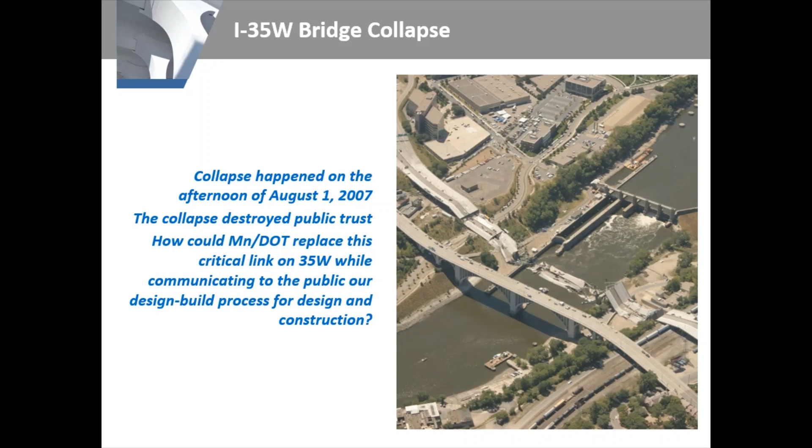Up until the time of the collapse, MnDOT had not utilized design-build on such a large project. The RFP contained criteria for communication, under the public involvement section, which was 15% of the total score. This included impacts to the public and an approach to communication, which was extremely important.

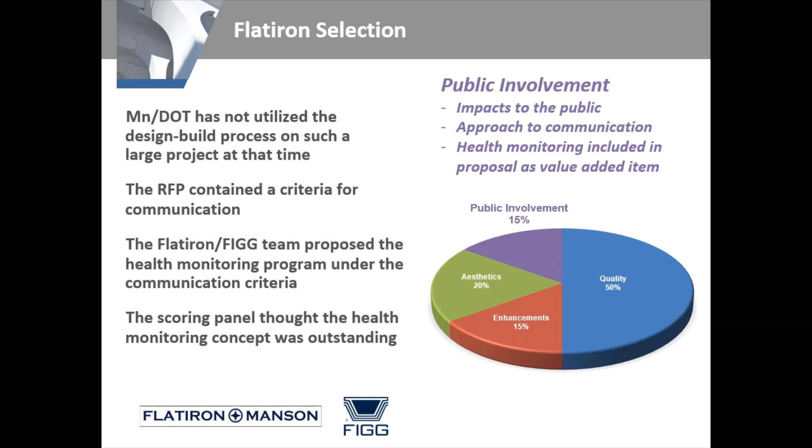The health monitoring system was included under the public involvement proposal as a value-added item. The scoring panel thought the health monitoring concept was outstanding, so it was developed and continued for the project. It ended up being a key component to help restore public trust.

MnDOT engaged with the University of Minnesota, nearby the site, to assist with data collection, modeling analysis, and reporting. It should also be noted that MnDOT doubled the number of sensors that the Flatiron/FIGG team proposed, and in retrospect this was a very good idea.

The goals of monitoring were threefold. One was to provide construction benefits. Getting sensors in at some locations as soon as possible allowed us to have knowledge of structural behavior during construction—for example, determining concrete strengths during curing, and temperatures during curing for mass concrete placements.

Also, understanding the bridge over time, that it was within certain design parameters. This included creep and shrinkage, global thermal movements, live loading such as displacements for a given live loading condition, and thermal gradients throughout the depth of the structure.

Also important was to restore public confidence. During design and construction, MnDOT was frequently asked about the bridge design since the project required a maximum 14-month schedule. The monitoring program was a key component in helping restore public confidence.

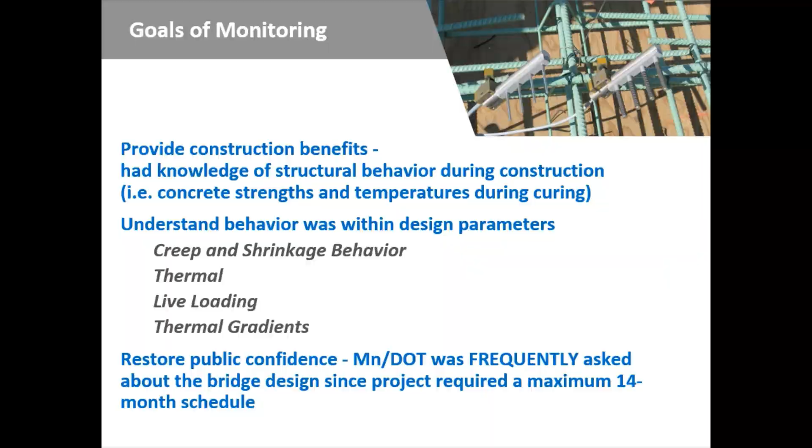Now I'm going to move into a description of the bridge, the design criteria that was utilized, and then the sensor types and their locations.

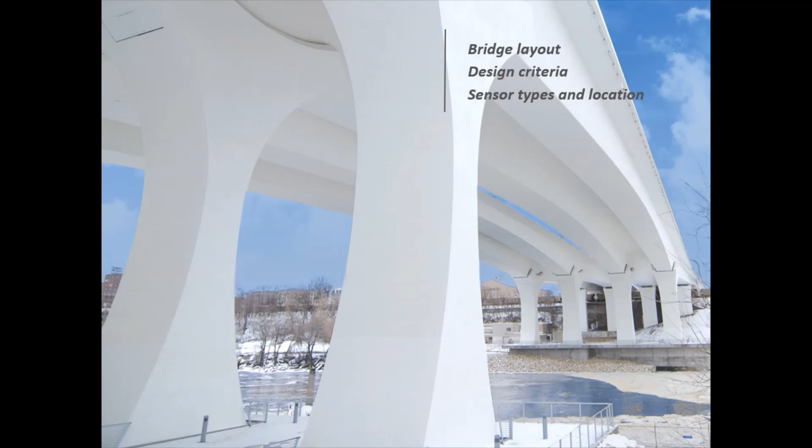Here you can see a longitudinal layout of the bridge. Some key components: it's a concrete segmental box girder bridge. The main span over the river used precast segments, cast adjacent to the site with the long line casting method. The remaining spans were cast in place on falsework.

The 3-span unit, main unit, was articulated with expansion joint at the abutment and at Pier 4, and pinned over the main piers, Piers 2 and 3. The north abutment was integral. The unique shape for the single span at span 4 was due to crossing over some railroads.

Spans 1 through 3 were 25 feet deep at the piers and 11 feet deep at midspan and ends. Span 4, to get over those railroads, was 6 feet deep at midspan. The abutments rest on driven steel piles, and the piers rest on drilled shafts socketed into rock—the main piers, 2 and 3. There's a northbound and southbound structure for the 3-span unit.

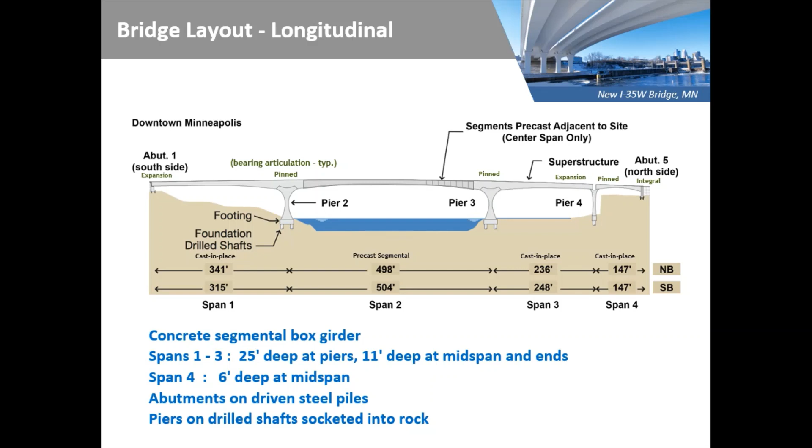The largest span was 504 feet over the river, and the side spans varied from 236 feet to 341 feet. Span 4 was 147 feet. In the transverse direction, each northbound and southbound alignment was 90 feet 4 inches wide—2 parallel bridges, each with 2 sets of concrete box girders.

These were connected with a small longitudinal closure strip in the center. The bridge was striped for 5 lanes in each direction; however, it was designed for 7 lanes, and also designed for a future configuration of 4 lanes plus a light rail or dedicated bus lane.

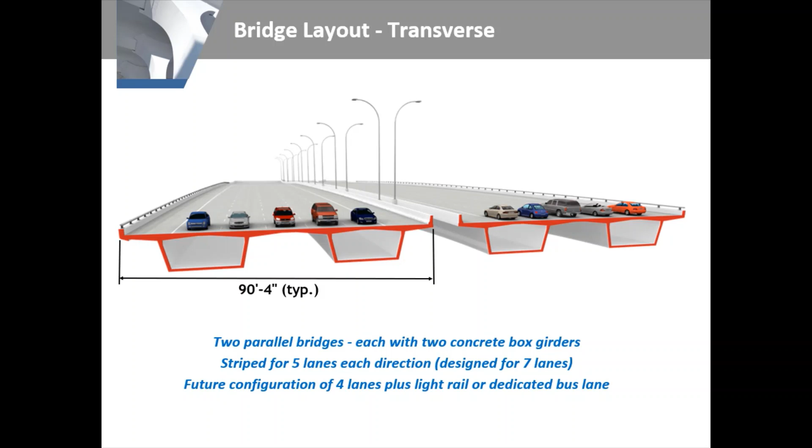Some relevant design criteria for the monitoring study included the following specifications: the MnDOT special provisions and design manuals, the AASHTO LRFD bridge design specifications (4th edition, 2007), and the CEB-FIP Model Code 1978, utilized for concrete time-dependent properties. This integrated with the in-house BC program used for time-dependent staged analysis.

For loadings, pretty basic stuff: superstructure concrete was set to 155 pounds per cubic foot, substructure concrete was 150 pounds per cubic foot, live loading was the standard HL93, and we had that future allowance for light rail as well.

The thermal gradients for design were from AASHTO LRFD Zone 2 with a 46 degree Fahrenheit top surface temperature. For coefficient of expansion of concrete, 6 times 10 to the minus 6 per degree F was utilized. Minnesota has extreme temperature ranges—very hot in summer, very cold in winter. The mean design temperature was 45 degrees F, with a rise of 75 degrees and a fall of 75 degrees.

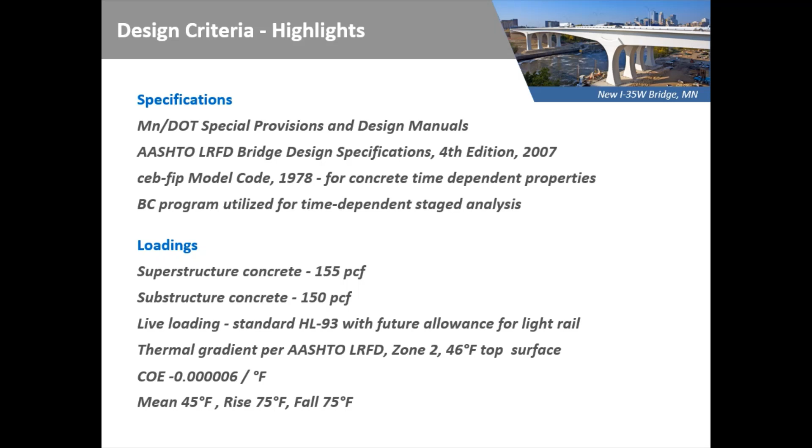For material properties, the pier concrete was 28-day strength of 4,000 psi, and the superstructure concrete was 6,500 psi. Typical PT strand, bars, and mild reinforcement were utilized: 7-wire strand for PT, grade 270, PT bars grade 150, and mild reinforcement at 60 KSI.

The time-dependent properties, again taken from CEB FIP 1978, used a relative humidity of 73%. Major parameters were the creep delayed modulus of elasticity at 0.4, and the creep flow coefficient of 2.38 from a casting day of 0, giving a total creep coefficient of 2.78 from casting day 0 to infinity. The shrinkage coefficient was 0.000223, also from casting day 0 to infinity. These numbers are pretty basic for a segmental bridge.

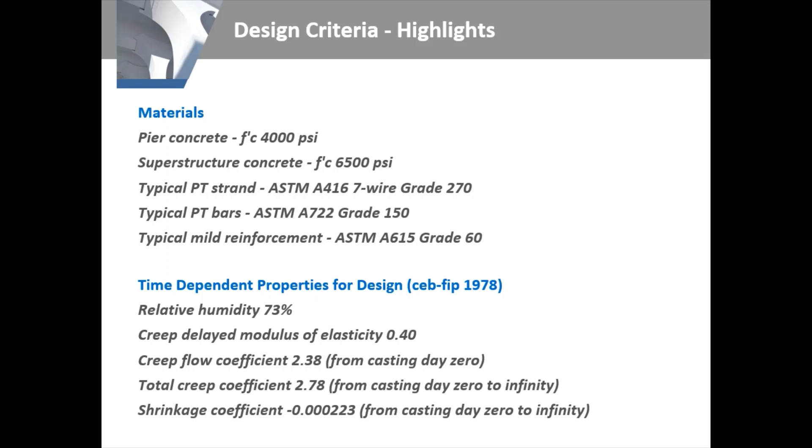For the allowable longitudinal stresses for the superstructure, maximum compression was 0.45 F'C for dead load plus PT. Including transient loads, it was 0.6 F'C times phi sub W. Phi sub W is per AASHTO LRFD 5.7.4.7. This is pretty typical for most segmental bridges.

For the maximum tension, however, the top surface was set to a minus 250 psi residual compression criteria. This was unique to the I-35W bridge. To put it in comparison to a tensile criteria, that would be about 3.1 square root F prime C in psi units. Again, this was a residual compression for the top surface.

For the bottom surface precast, no tension was allowed, and for the bottom surface cast-in-place, 3 square root F prime C in psi units was allowed. Principal tension was the basic requirement, 3.5 square root F prime C in psi units.

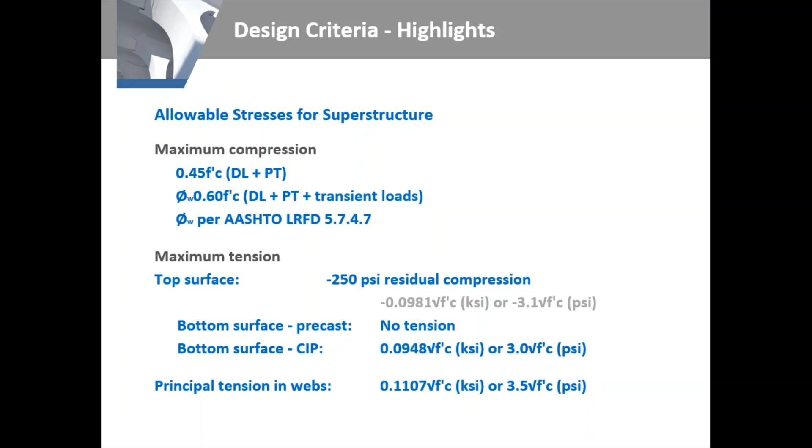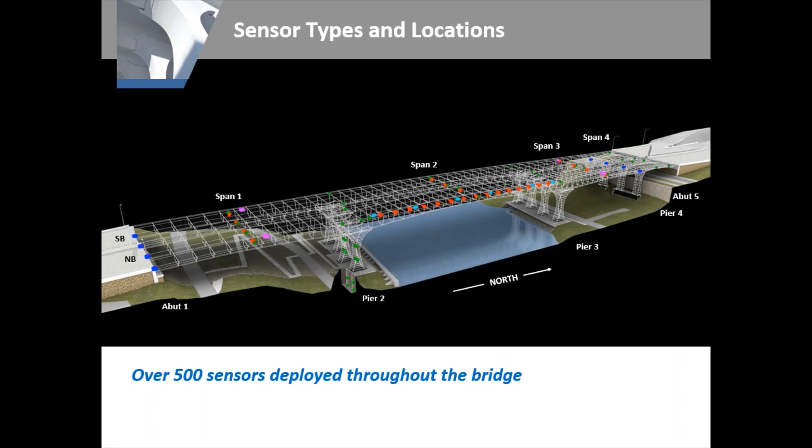Moving on now to sensor type and locations. Over 500 sensors were deployed throughout the bridge, using 7 sensor types.

These were vibrating wire strain gauges with integrated thermistors to measure temperatures, resistance strain gauges, fiber optic sensors, linear potentiometers at the expansion joints to measure movements, accelerometers at various locations, and some corrosion monitoring sensors in the deck. Many additional standalone thermistors were also placed at various locations in the cross sections to measure temperature.

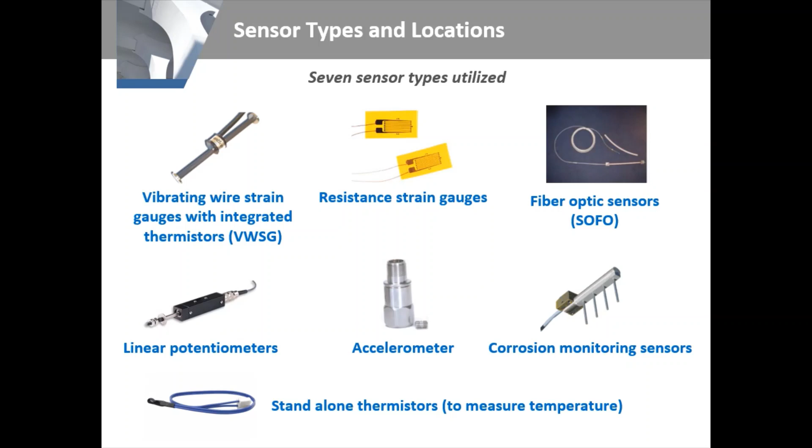Now moving on to specific sensor locations. The vibrating wire strain gauges and the resistive strain gauges provide strain and temperature information about the bridge's response. The vibrating wire strain gauges are located in the superstructure, and the resistive strain gauges are located in the substructure for Pier 2 for the northbound bridge. These resistive strain gauges were only utilized and monitored during construction; they were not wired for long-term use.

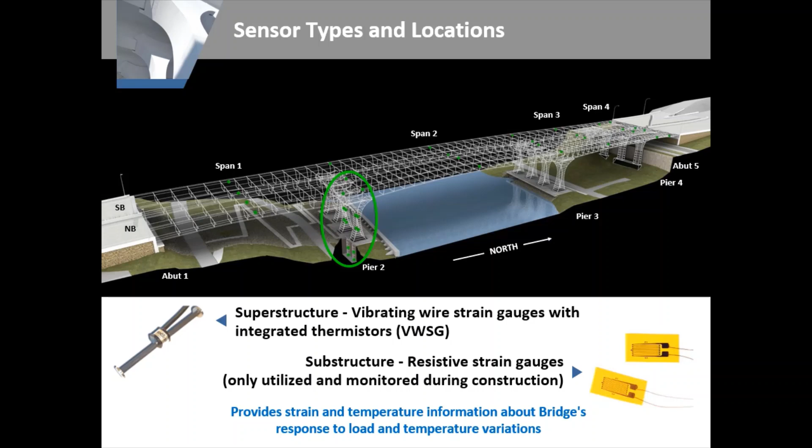Shown here is the location of the fiber optic sensors in light blue. These are 13-foot long strain gauges, placed externally inside the box in the longitudinal direction. Not only do these measure average strains, but given the 13-foot length, they can also measure curvature and deformed shapes. One item to note is that 6 locations are shown, but at each location there was a sensor placed on the top slab and on the bottom slab inside the box, so for many of these diagrams there'll be multiple sensors at a given location.

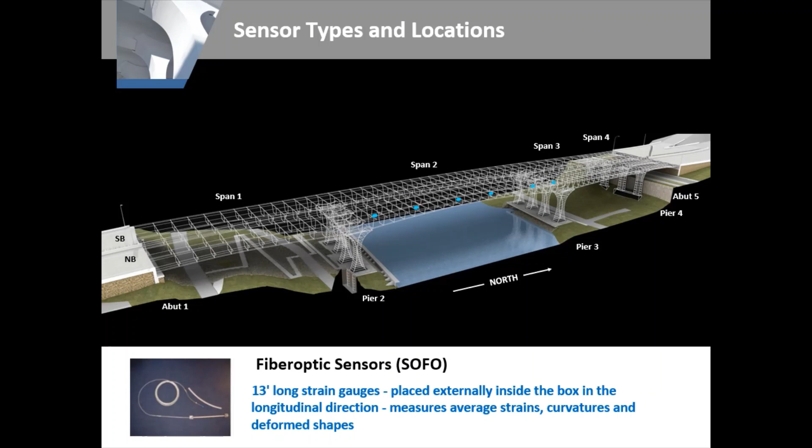Linear potentiometers were placed in both the north and southbound structure at each of the expansion joints. These measured the longitudinal bridge movements by having a piston that could move back and forth.

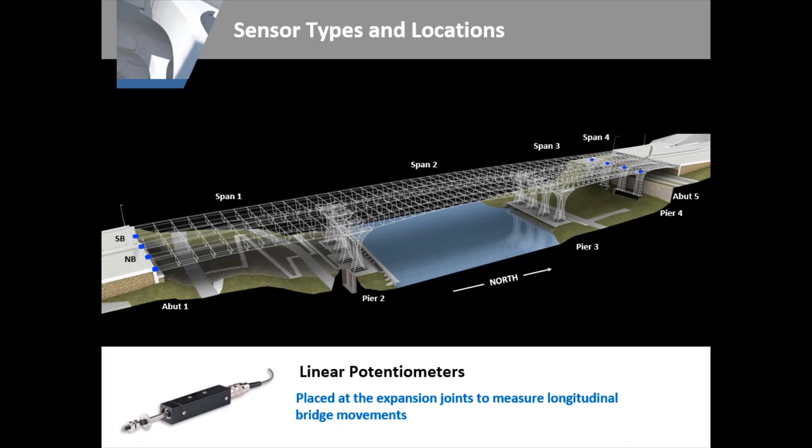Accelerometers were placed at the midspans of spans 1, 2, and 3 for both the southbound and the northbound structure. However, there were also additional sensors placed within the northbound structure over the main span. The accelerometers record the structure's response to live loads and moving loads, and using data analysis you can also extract and estimate the vertical displacements due to these loads.

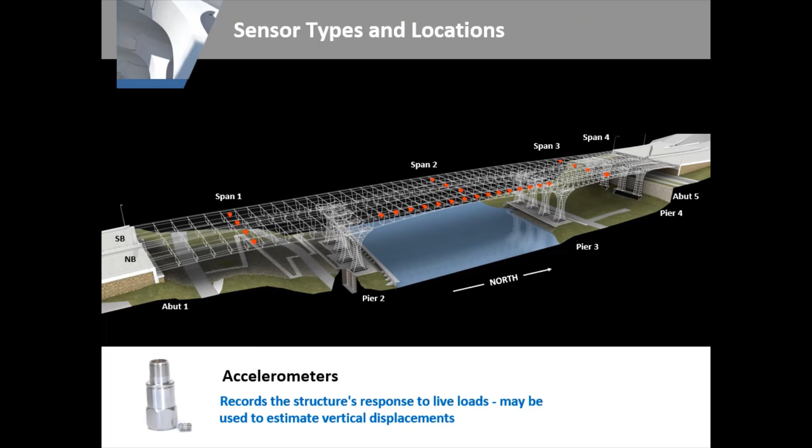Corrosion monitoring sensors were also included. These were in spans 1 and 3 for both the southbound and northbound structure, embedded in the top deck. They were used to measure the potential of chloride penetration in sacrificial steel rods that protruded from the sensors themselves.

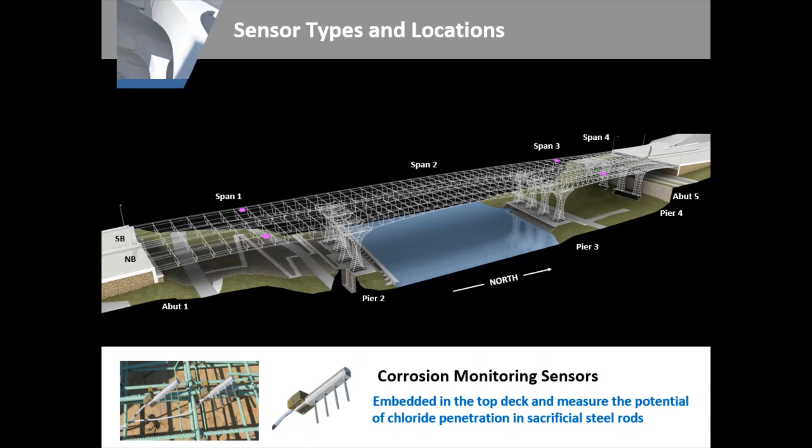Many additional thermistors were also added into the concrete at various locations, at spans 1, 2, and 3 at midspan, and also over the piers. These were cast internally into the concrete to directly measure temperatures.

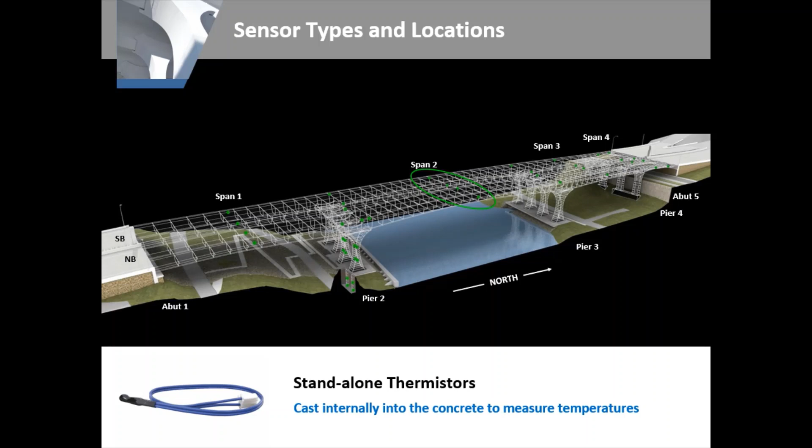Now to go into a little more detail on where the thermistors are located: the primary concentration of them is at the midspan of span 2 on the southbound bridge and the midspan of span 2 on the northbound bridge. The circles shown here in green show the location of the thermistors, and the number near the circles shows the number of actual thermistors at that particular location. The line through the circle shows the orientation of how those thermistors are distributed within that location. For example, at a location with 6 sensors, there would be one near the top, one near the bottom, and 4 distributed evenly throughout the depth of that section.

For this particular study, the mid-main span and linear potentiometers at the expansion joints are what provided the most data for the study.

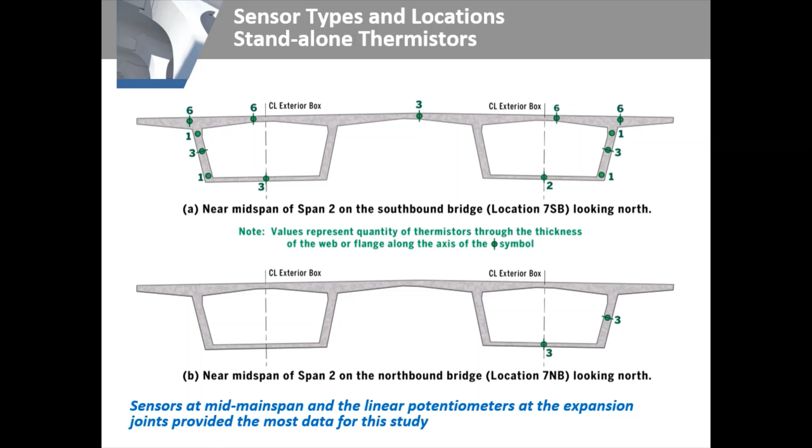For data acquisition, all the sensors were wired to a server shed near the bridge. Here you can see a picture of that. This shed also incorporates the anti-icing system, so it's kind of a dual purpose.

There are 2 main components to data acquisition: static results and dynamic results. For static results, vibrating strain gauges, fiber optic gauges, and thermistors were utilized. Originally this was set up to record data every 6 hours, but after 1 year of operation, the sampling rate was changed to every hour. This was to capture the maximum thermal gradients, since a 6-hour sampling rate was found to be too coarse.

For dynamic monitoring, accelerometers, linear potentiometers, and fiber optic gauges could be utilized. Originally this sampling rate was 200 hertz, but that was backed off to 100 hertz, and then the linear potentiometers were backed off further to 4 hertz. One year of dynamic monitoring requires about 250 gigabytes of storage.

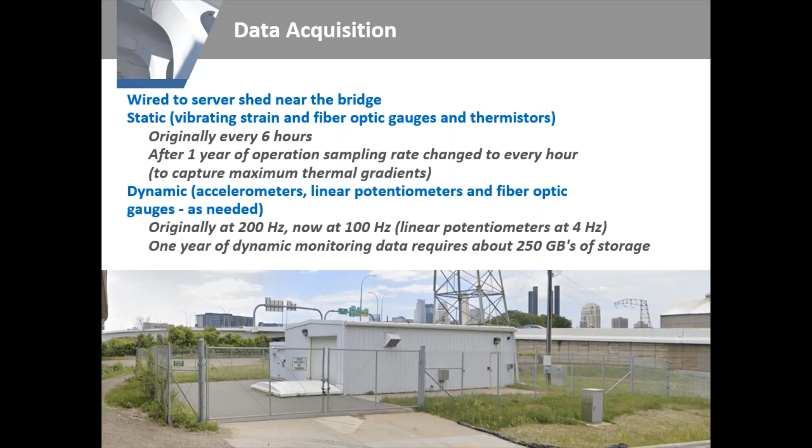Sensor tests and calibrations were performed before the bridge was open to traffic. Live load testing was performed the late evening of Sunday, September 14, 2008.

In joking, we were talking about using elephants for this test, but obviously 8 sand trucks side by side at 25 tons each would be easier to utilize. Elephants is our code word.

These sand trucks were driven slowly, under 5 miles an hour, across the bridge, and the sensors were monitored. They were stopped temporarily at various key locations, for instance the mid-spans of each span. We found that the structure behavior was stiffer compared to the design. This was completely expected, since the concrete strengths achieved in the field were quite a bit higher than the 28-day strengths from design.

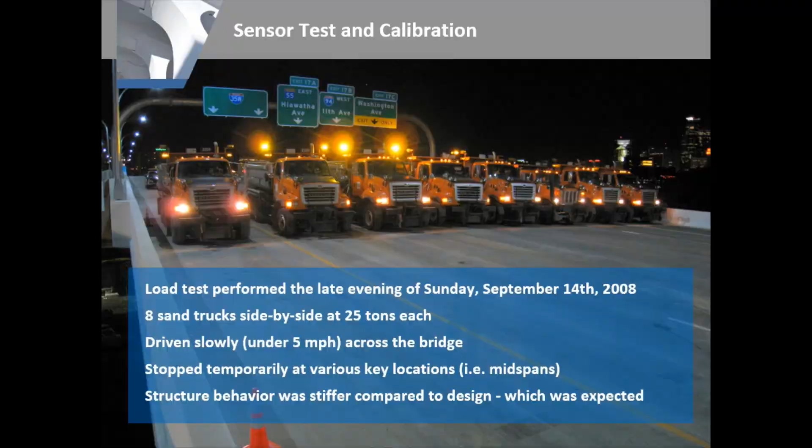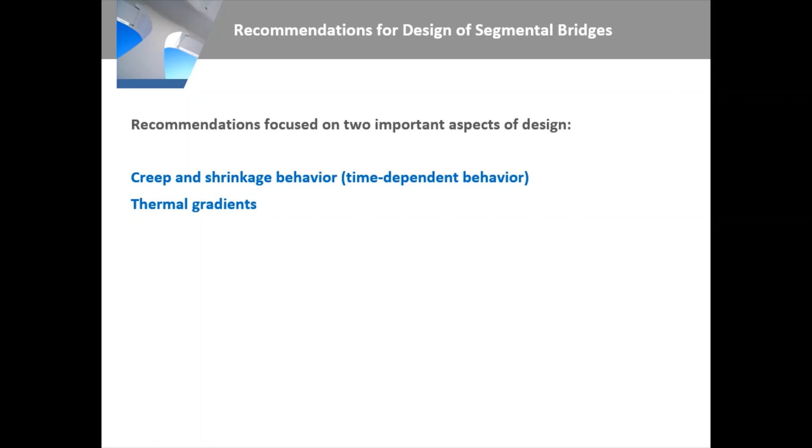Now Kent is going to provide an evaluation of the 10-year study along with recommendations for design. The report focused on 2 important aspects of design: creep and shrinkage behavior, which is a time-dependent behavior, and thermal gradients. So why is creep and shrinkage important for the design of segmental bridges?

Creep strains typically lead to superstructure moment redistribution. Creep strains also induce column moments due to axial shortening, and there are equilibrating superstructure moments if you have monolithic columns. Shrinkage strains, on the other hand, do not lead to significant superstructure moment redistribution. Shrinkage strains, similar to creep strains, induce column moments due to axial shortening, with equilibrating superstructure moments for monolithic columns.

Creep and shrinkage strains are a major contributor to bearing and expansion joint movements, typically larger than the thermal movements when taken together. Overall in the design, creep strains typically dominate over shrinkage strains in their impact on the design. That is due to the fact that it leads to moment redistribution, which is very important, and also due to the amount of pre-stress used in structures today.

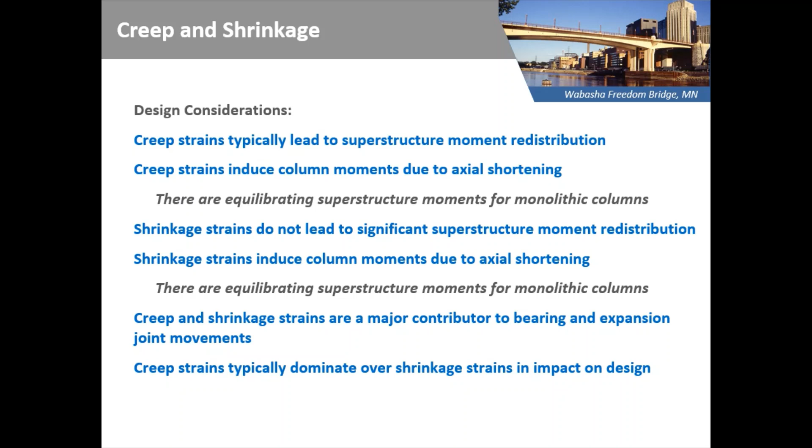Now, due to creep, the moments are going to creep from the end-of-construction moments towards the continuous moments, but they're not going to get all the way there. How far they get is a function of creep, which determines not only the magnitude of the positive moment at midspan, but how far that positive moment extends towards the pier. So again, this is very important for analyzing segmental structures.

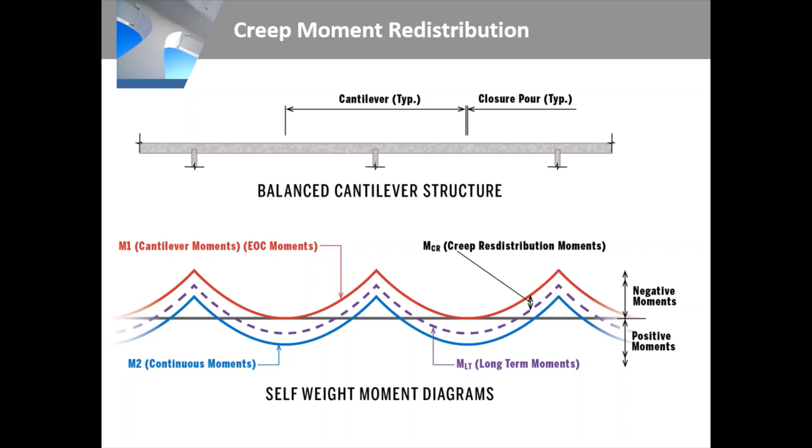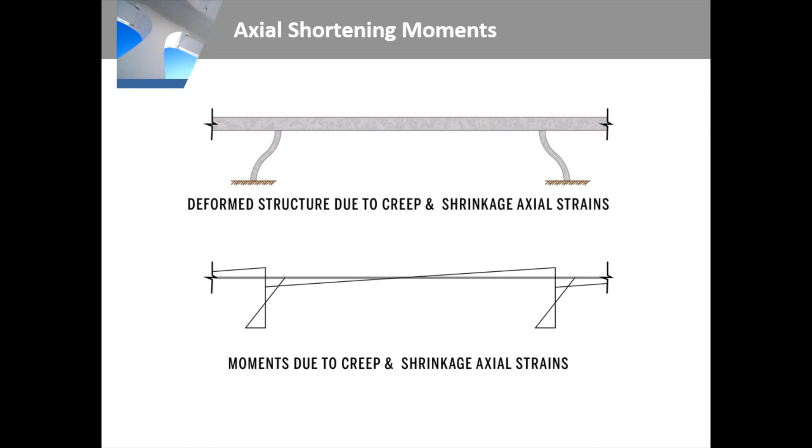Another consideration in the design of segmental bridges is that the design is based upon 2 times in the bridge's life: end of construction, and when the bridge first opens to traffic, when there is minimum creep and shrinkage in the completed bridge. There is some early stage creep and shrinkage that does occur during construction, but this typically does not affect designs all that much.

The second time we check the design is at long term, at the end of the bridge's design life expectancy, when there is maximum creep and shrinkage. The design for each time is a complete service and strength limit states design. By doing this, with minimum creep and shrinkage on one side and maximum on the other, we bracket the design, and using a model that produces the maximum creep and shrinkage increases that bracketing and the reliability of our bridge.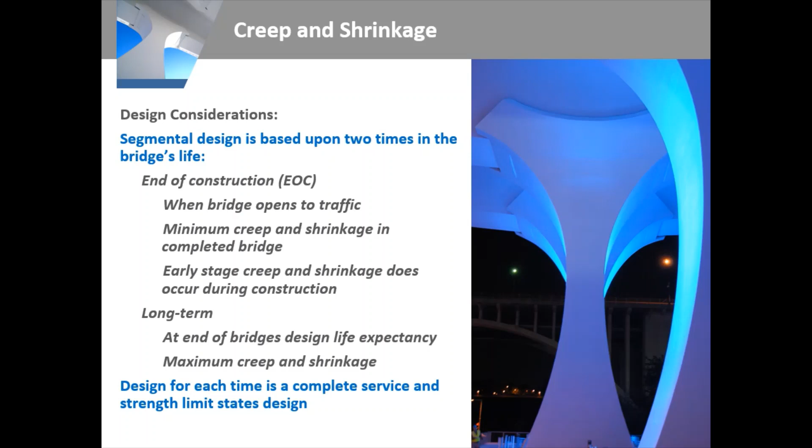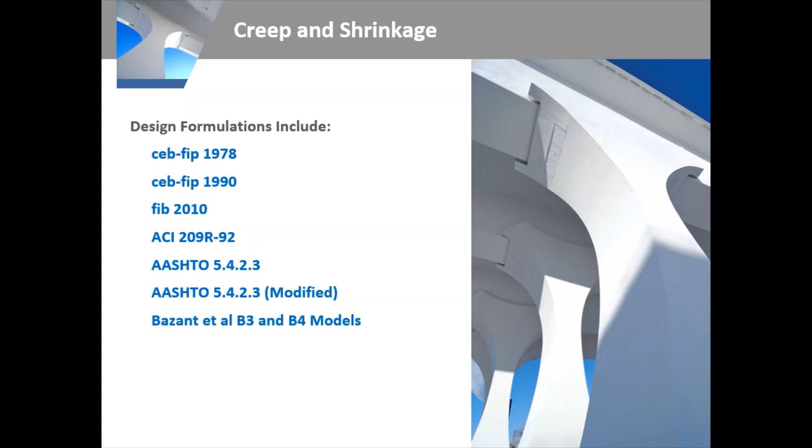There are a lot of design formulations for creep and shrinkage, including model codes like 1990, 2010, ACI, AASHTO equations, and Professor Bazant has proposed several models. Recently, ASBI did a study of creep and shrinkage formulations that dovetails nicely with the I-35 report.

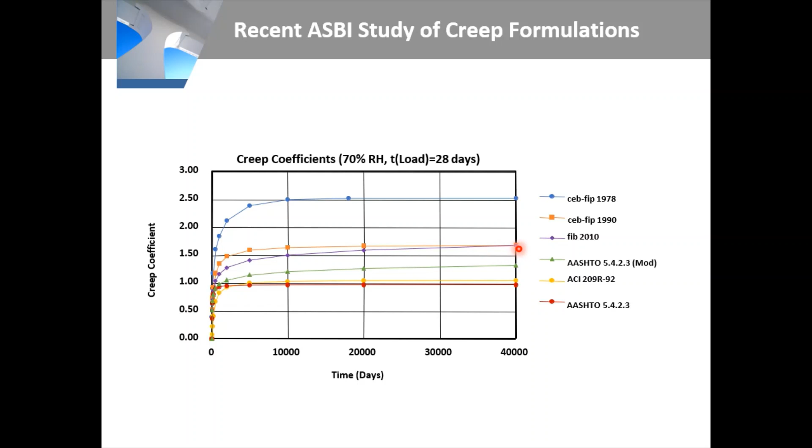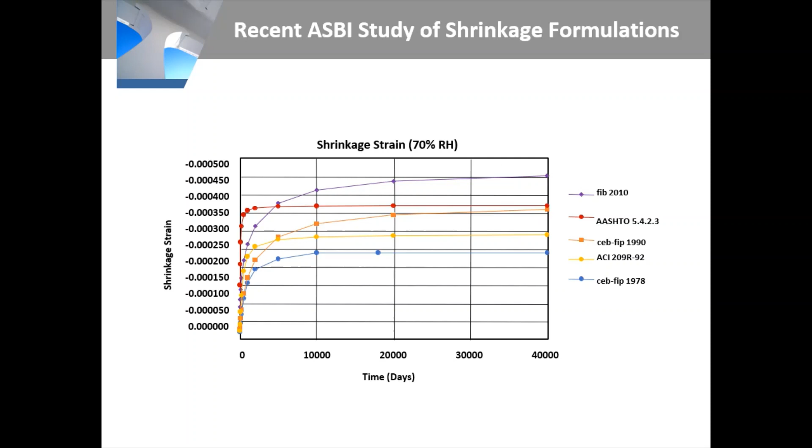So what does the I-35W monitoring report say? It compared creep and shrinkage behavior in two ways: first, by checking the longitudinal displacements in the structure, which allows you to check the axial effect of creep and shrinkage, as well as creep and shrinkage strains, which allows you to check the redistribution effect.

Measured displacements and strains at various locations along the bridge and in the cross-section, then used a finite element model to calculate the same displacements and strains for several creep and shrinkage formulations. It compared the measured displacements and strains to the calculated ones. The goal was to ascertain which creep and shrinkage formulations best modeled the I-35W bridge.

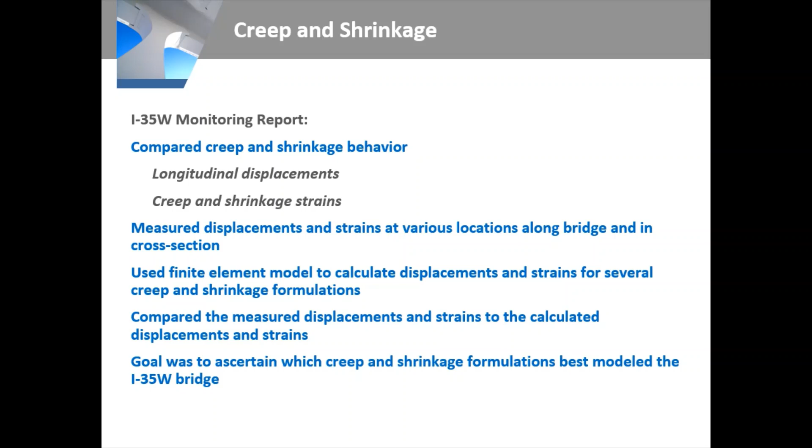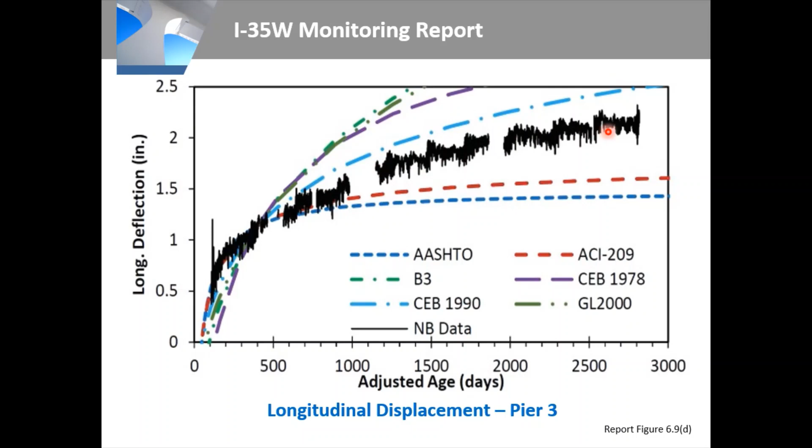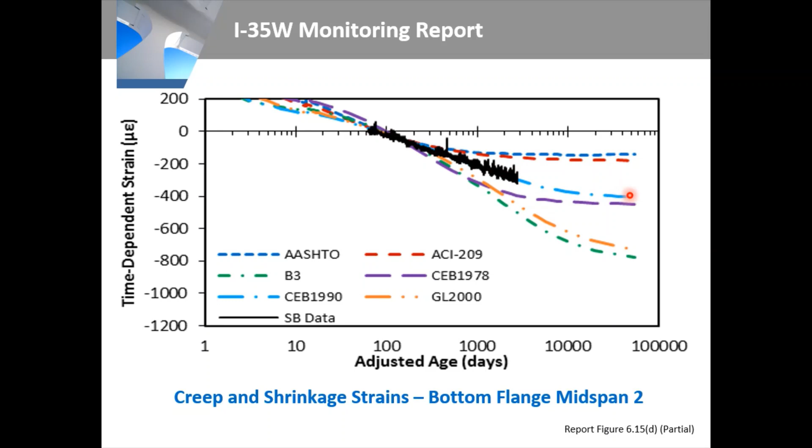So what are some of the conclusions and recommendations from the I-35W monitoring report? The measured behavior was bounded by model code 1990 and the ACI formulations. ACI typically underpredicted creep and shrinkage behavior and served as a lower bound, while model code 1990 overestimated creep and shrinkage behavior and served as an upper bound. Therefore, model code 1990 would be best for design that is conservative and overpredicts behavior.

Remember, the design is already bracketed by end of construction with minimum creep and shrinkage, and the long term with maximum modeled creep. So overestimating long-term creep and shrinkage produces a wider bracketing in the design and hence a more reliable design. Based on the ASBI study, model code 2010 is also an acceptable creep and shrinkage formulation, as it has behavior similar to model code 1990.

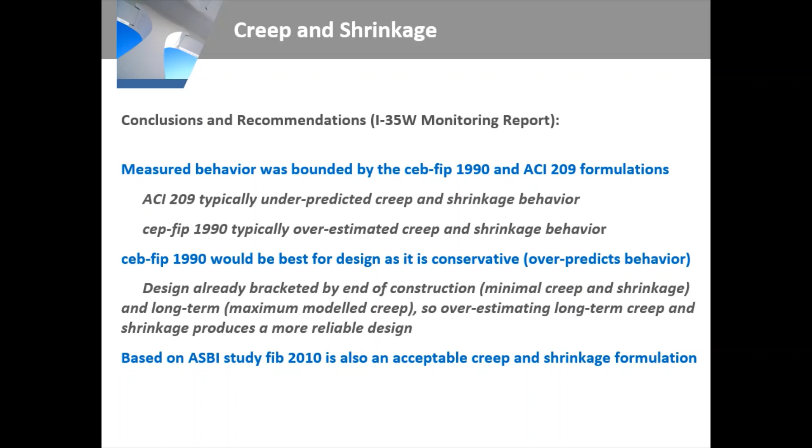Now we'll talk about thermal gradients. Why are thermal gradients important in the design of segmental bridges? Thermal gradients produce stresses in the cross-section, and it's primarily the tensile stresses we're interested in. Nonlinear gradients produce self-equilibrating compatibility stresses due to the assumption of plane sections, and this is true for both indeterminate and determinate structures. Linear and nonlinear gradients produce stresses due to kinematic restraints in statically indeterminate structures.

Positive thermal gradients, with the top fiber warmer, tend to produce tensile stresses in the design of the bottom fiber. Negative thermal gradients, with the top fiber cooler, tend to produce tensile stresses in the design of the top fiber. The magnitude of the stress is a function of the magnitude of the gradient, the difference between the top and bottom temperature, but also the shape of the thermal gradient is very important in determining the magnitude of the stress.

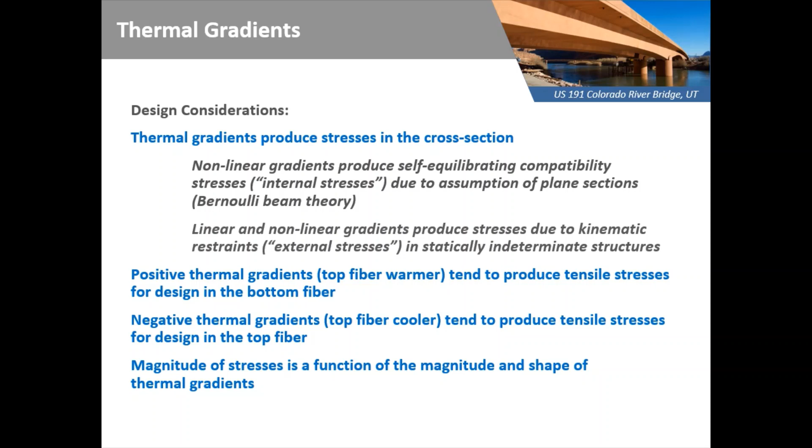This is a graphical representation of what we've been discussing. On the left are the internal stresses due to a nonlinear portion of the gradient. They occur in either a statically indeterminate or determinate structure. In the center are the external stresses to the restraints of indeterminate structures. You add the two together and you get the total stresses.

This happens to be for a positive thermal gradient, so there's tension on the bottom. But I want to call your attention to this spike up top. For a negative thermal gradient, that spike is tensile, and the magnitude can be fairly high and requires a significant amount of extra post-tensioning to combat. Yet the extent of that spike only extends a few inches down into the cross-section. We'll talk more about this in later slides.

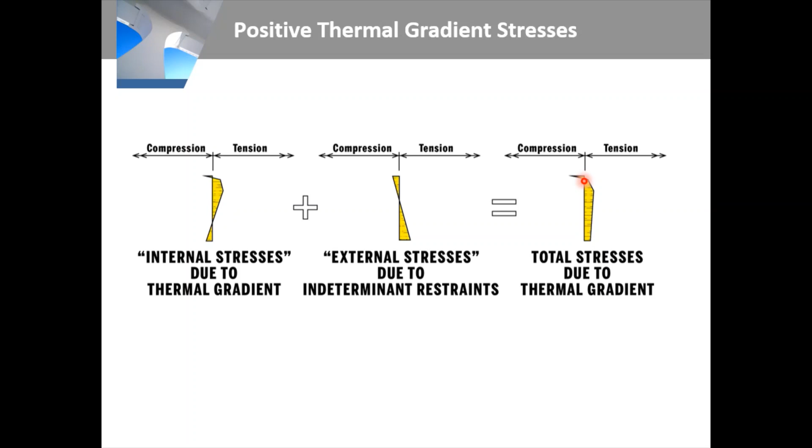So what does the I-35W monitoring report have to say? They compared thermal gradients in the cross-section to design thermal gradients from AASHTO and the New Zealand Code. Due to the number of thermal sensors in most sections, the magnitude of the gradients could be measured and compared. But one section, the midspan of span 2, is heavily instrumented, and the gradient shapes could also be compared.

Now this was all measured. Given the code gradients and the measured gradients, stresses were then calculated and compared to calculated stresses from the design gradients. The goal was to ascertain which design thermal gradients matched the measured I-35W bridge thermal gradients the best, and calculated stresses for measured and designed thermal gradients were also compared.

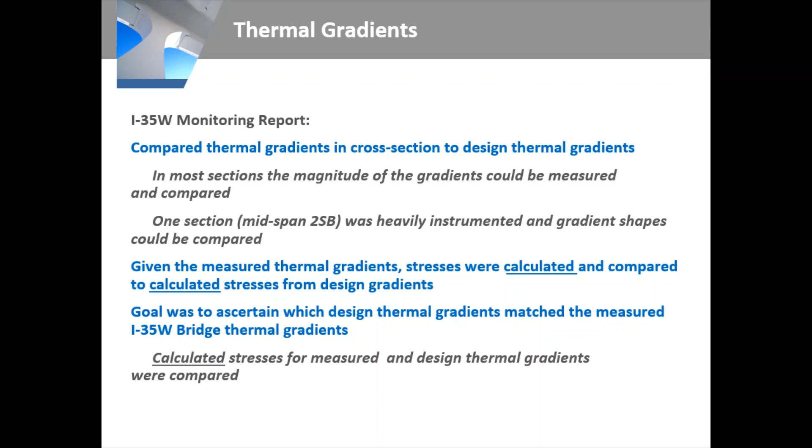This is a graphic from the report comparing the AASHTO and the New Zealand or Priestley gradients. Let's take a look at the graphic on the right as it's a zoom of the top slab, so you can see a little better what's going on. Notice both gradients have the same top temperature. It's because they've scaled the New Zealand gradient to have the same zone 2 top temperature, 46°F, as AASHTO has for bridges in Minneapolis.

This is the AASHTO bilinear gradient extending 16 inches into the cross section. This curved line is the New Zealand gradient extending about 1 meter into the cross section. You can see that there's a greater area under the curve for the New Zealand gradient, so it's going to have a greater impact on the stresses in the cross section.

On the left are the negative gradients. This is the bilinear AASHTO gradient, minus 0.3 of the positive. The New Zealand gradient is linear, the top temperature minus 0.4 of the positive. I called your attention to what the stresses would be about 2 inches down into the cross section. Due to the shapes, they'll be quite a bit different, even though the top temperature is the same.

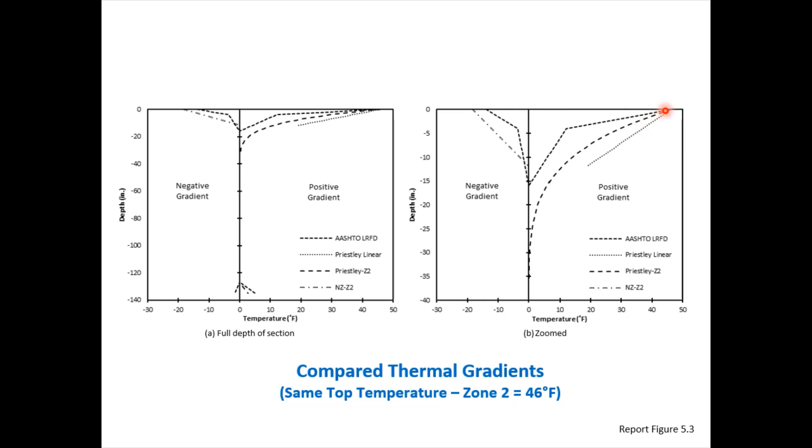This is a graphic from the report comparing the gradient magnitudes. I realize that both the New Zealand and the AASHTO have the same top temperature, so we're really comparing temperatures 2 inches below the surface to temperatures on the bottom. On the top, we see the positive gradients cycling throughout the year. We can also see that they regularly exceed the AASHTO gradient, while the New Zealand or Priestley gradient serves as a reasonable upper bound. On the bottom are the negative gradients.

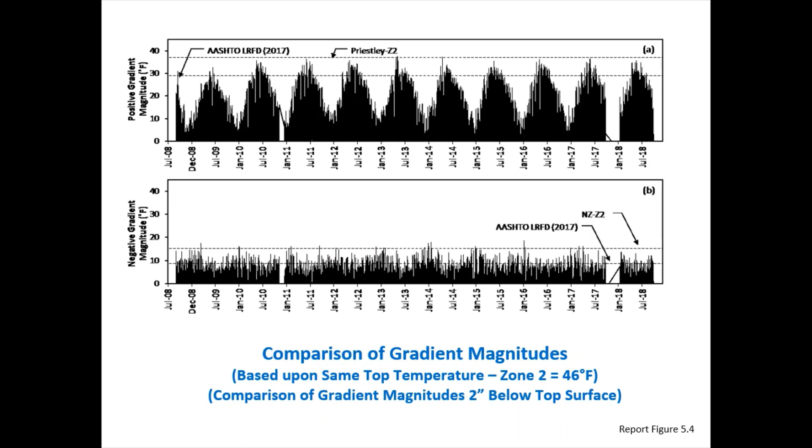Remember that AASHTO has a different multiplier, minus 0.3, compared to the New Zealand gradient with minus 0.4. You see that the gradients regularly exceed the AASHTO gradient, but that the New Zealand gradient serves as a reasonable upper bound on the measured gradients. There's a few blips here and there, but all things considered, that's a reasonable upper bound.

Now we'll discuss the shape of the gradients. On the right is a section that includes the top slab, the webs, and the bottom slab. On the left is a section that includes just the top slab with no webs below. Let's focus on the left section because it's at a scale where we can more easily see what's going on.

We see the bilinear AASHTO gradient here and the curvilinear Priestley gradient here, both to the same top temperature. And these are the points of measured gradients at different times in the structure's life. You can see that they're trending basically upwards towards about the same temperature, so that's a good confirmation. But we also see that these points effectively track more closely to the Priestley gradient. And as we noted before, the area under the curve greatly influences the stresses in the structure.

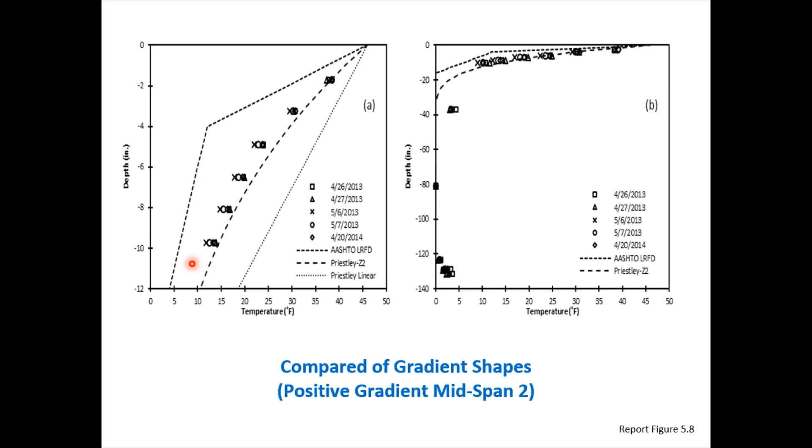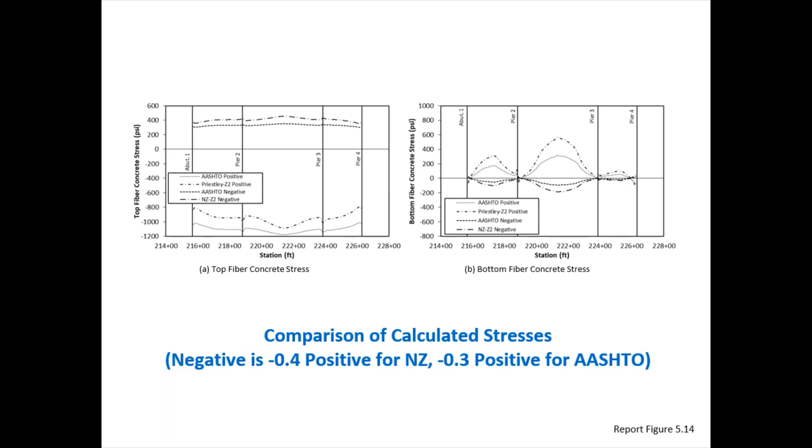Now let's look at the stresses computed from some of the measured gradients as compared to some of the specification gradients. Curves were fit to various measured gradients, and then stresses were calculated the same way as for the specification gradients. This graphic from the report shows stresses top and bottom, both for negative gradients.

On the left we see the top fiber stress, with colors representing the measured gradients. For most of the gradients they track fairly closely to the New Zealand gradient, while the AASHTO gradient predicts less stress.

On the right are bottom fiber stresses, and we can see the same basic trend: for the most part, shown in the colors, the measured gradient stresses track very well with the New Zealand gradient, with the AASHTO gradient producing somewhat less stress. So what are the magnitudes of these differences in stress?

For the bottom fiber at midspan 2, the New Zealand gradient versus the AASHTO gradient produces an extra 124 psi, or about 1.5 square root f prime c. For the top fiber at midspan 2, the measured gradient versus AASHTO produces about 130 psi extra tension, about 1.6 square root f prime c.

Now we want our designs to be as accurate as possible, so this is good information for future code adjustments. I think we realized that if we had about 1 to 2 square root f prime c extra tension in our structure that's already been designed, we wouldn't be that concerned about it. There probably wouldn't be cracking at that level of stress.

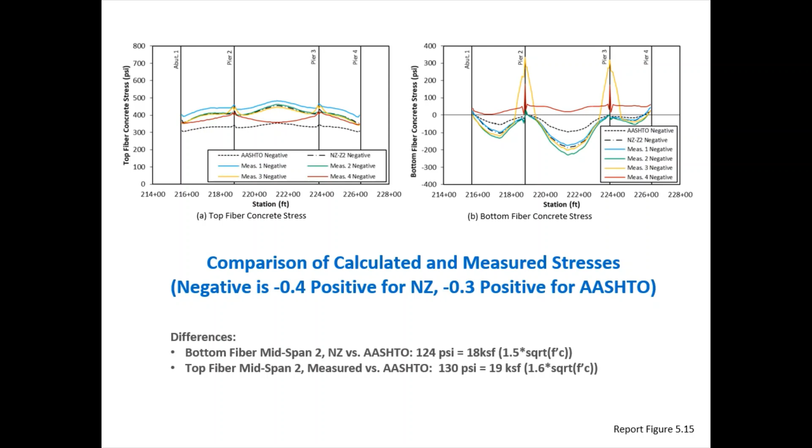So what are some of the conclusions regarding thermal gradients in the I-35W monitoring report? The measured thermal gradients are more accurately predicted by the New Zealand code proposed by Priestley. The AASHTO LRFD Zone 2 top temperature of 46 degrees Fahrenheit appears reasonable for Minnesota. The shapes are different, and the multipliers for negative gradient appear more accurate for the New Zealand code, minus 0.4 versus minus 0.3.

Interestingly enough, I went back and took a look at the AASHTO guide specifications for thermal effects of concrete bridge superstructures, and found out that the AASHTO LRFD specifications don't follow exactly this document. The AASHTO guide specification design gradients more closely follow the New Zealand code and will produce higher calculated stresses than the AASHTO LRFD specifications—really somewhere in between, but closer to the New Zealand code.

The AASHTO guide specifications were used for design from approximately 1990 to 1995. Why this information wasn't brought forth into the LRFD specifications, I really don't know.

Now, the calculated stresses using the New Zealand code gradients most effectively capture the stresses calculated using the measured gradients. And the calculated stresses using the New Zealand code gradients and measured gradients are larger than calculated stresses using the AASHTO LRFD specifications, as we have seen from some of the previous graphs.

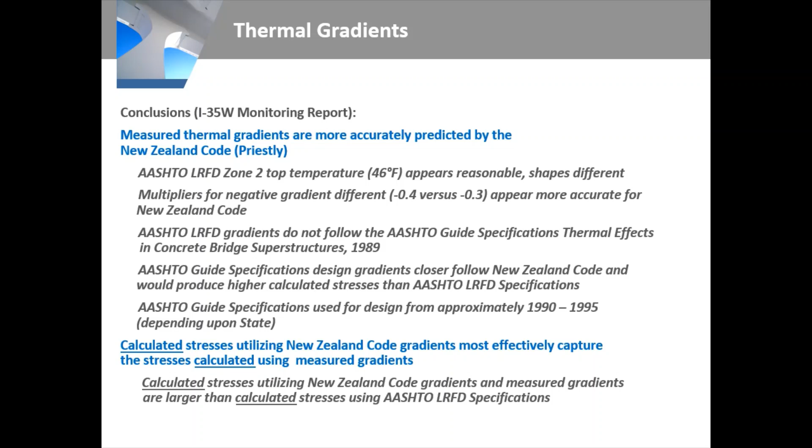Some additional thoughts regarding the conclusions. Thermal gradients in the bridge were measured, and a lot of good information was obtained. Stresses, on the other hand, were calculated based upon standard methods, assuming plane strain within the depth of the cross-section.

It is suggested in this presentation that existing strain gauge data could be used to verify the plane strain assumption. It is further suggested that existing data could potentially be used to tease out something closer to a measured stress.

Note that other research, such as this report at the University of Florida, indicates that the very steep strain gradient associated with thermal gradients has minimal influence on cracking behavior. They concluded that self-equilibrating compatibility stresses from the nonlinear portion of the gradient can possibly be ignored for design, and that you need to utilize only the stresses due to the kinematic restraints. This would help save a lot of post-tensioning, combating that sharp spike in tension stress that we saw.

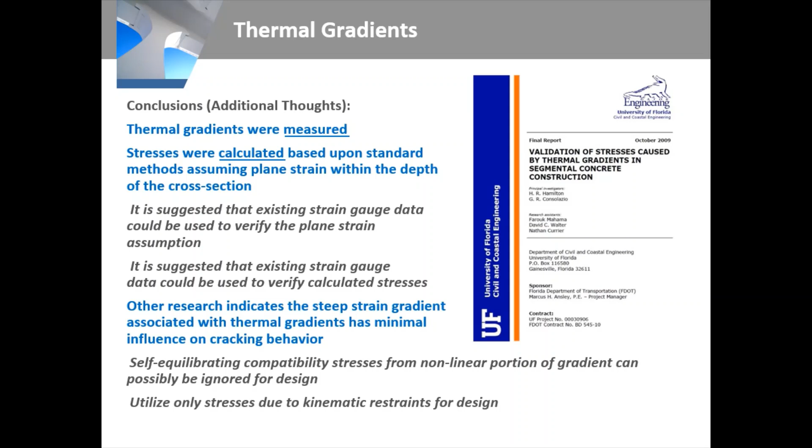Some recommendations regarding thermal gradients. Additional research may be needed to determine thermal gradients for different locations across the United States. Current AASHTO LRFD specifications utilize a fairly coarse distribution oriented mostly east-west. Note that significant research does exist from authors in locations such as Minnesota, Hawaii, Texas, and California. So there's a good start to this research.

It can either verify or possibly refine the current AASHTO zones. Very importantly, additional research is needed to determine thermal gradient influence on cracking behavior. At least one researcher has determined that the nonlinear portion of the gradient doesn't seem to have a great influence on cracking. There's also a lack of anecdotal evidence on cracking behavior due to negative thermal gradients.

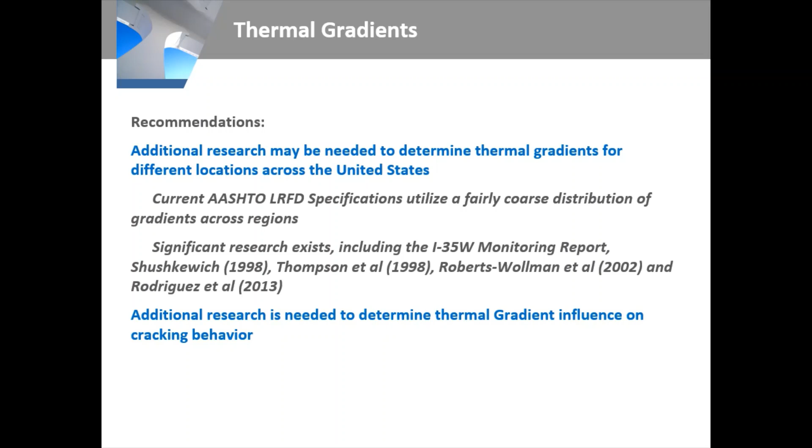The monitoring system was the first holistic bridge monitoring done in the state of Minnesota. Approximately 90% of the originally installed sensors are working, which is a really great track record. Excellent data was obtained for the I-35W Bridge, and the knowledge adds to a better understanding of the behavior of all segmental bridges, as well as concrete box girders in general. Engaging the University of Minnesota was very important to study the large amount of data, model the bridge behavior with different creep and shrinkage models and thermal gradients, and provide an independent view of the information obtained.

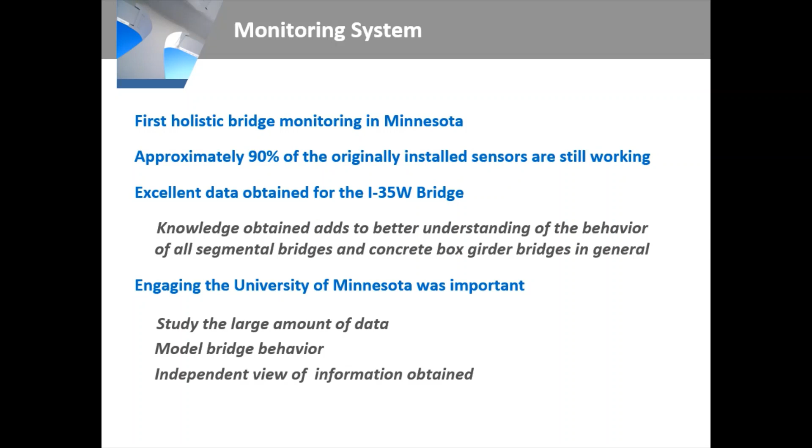Some lessons learned from the monitoring system: no usable data was obtained from the corrosion monitoring system, so that should be done differently, if at all. Temperature readings are very important for strain gauges, so for externally applied strain gauges it's important to place internal thermal sensors nearby, get absolute readings as soon as possible after installation for a benchmark, and have researchers on site during installation and for initial readings to know the exact sensor locations.

For maximum thermal gradient, readings at a sampling rate of about once per hour should be utilized. However, a sampling rate of once every 6 hours should be sufficient for long-term effects. Need to consider electrical grounding and ease of power cycling, protect from electrical storms, and eliminate downtime. For thermal gradient monitoring, need to have more than one heavily instrumented section, placing sensors heavily in each section that has considerable differences in section properties.

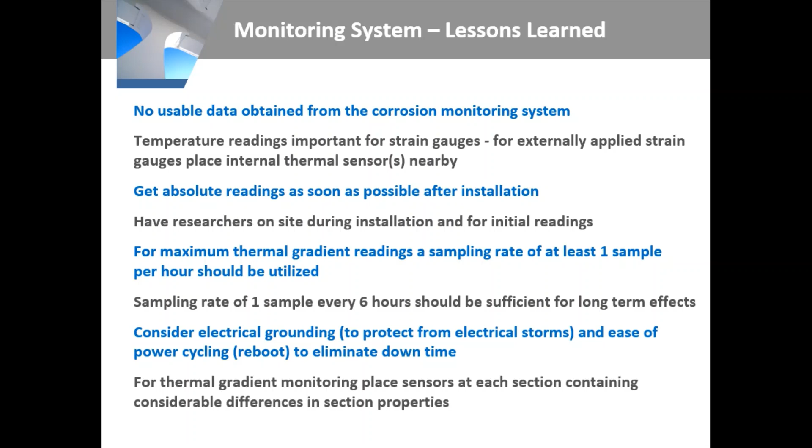A summary of the results: the Model Code 1990 predicts the measured creep and shrinkage behavior of the I-35W Bridge most closely. Both ACI and AASHTO underpredict the measured creep and shrinkage strains and displacements, and therefore would be somewhat unconservative to use for design. The Model Code 1978 overpredicts the creep and shrinkage strains and displacements, and is therefore conservative. Based upon the ASBI study, the Model Code 2010 would also be a good creep and shrinkage formulation for design, with very similar behavior to Model Code 1990, especially at an age of about 100 years.

The New Zealand Code thermal gradients match the measured gradients of the I-35W Bridge most closely, and the AASHTO thermal gradients tend to produce lower stress effects than either the measured or the New Zealand gradients, primarily due to the shape of the gradient.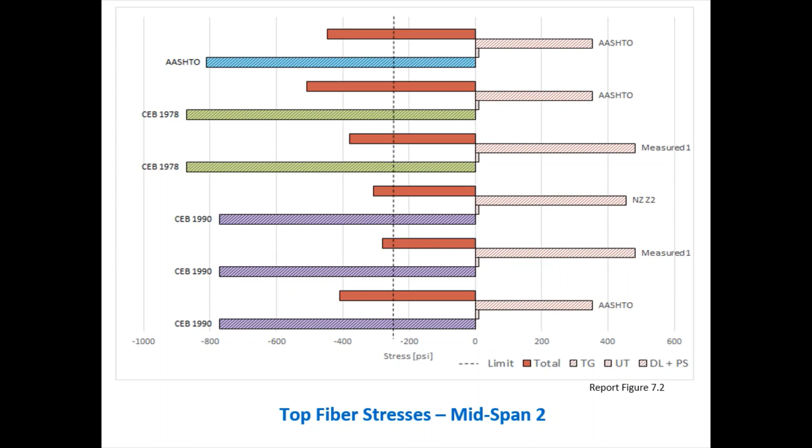And that concludes the presentation. We thank you for taking time to view this presentation and hope that you found it informative.

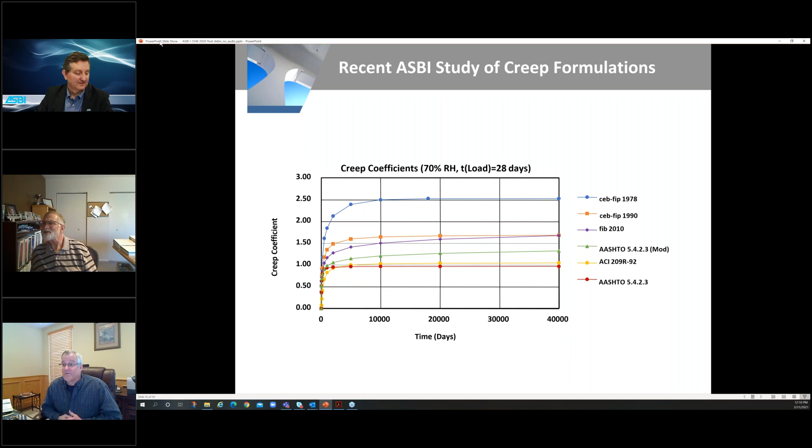I believe you're probably talking about the gaps in the data there. And again, that would be slide 38, I believe. And I believe that is just simply when we lost data acquisition to power glitches and stuff.

Gotcha. And so we had to pick it up a little bit later. Is that your understanding, Chris? Yes, absolutely, that's correct. There were times where data was not collected due to the system being down. They had to rewire it, or it went through a lightning strike and it was down for a few months or a few days. So there are little areas where data has not been recorded.

So, and then there's a spike at day 100. Oh yeah, there's a little one. That's a good question. I really don't know what went on there, to tell you the truth. Sometimes early on in data acquisition, in the early days, you just get these anomalous spikes, and just through observation, I would throw it out as a data anomaly.

Right. It might have been a lightning strike or something, but the power was still on, and the filtering software didn't catch it. Yeah, hard to say. I don't remember it being specifically mentioned in the report. It might have been. Obviously, it's an anomaly.